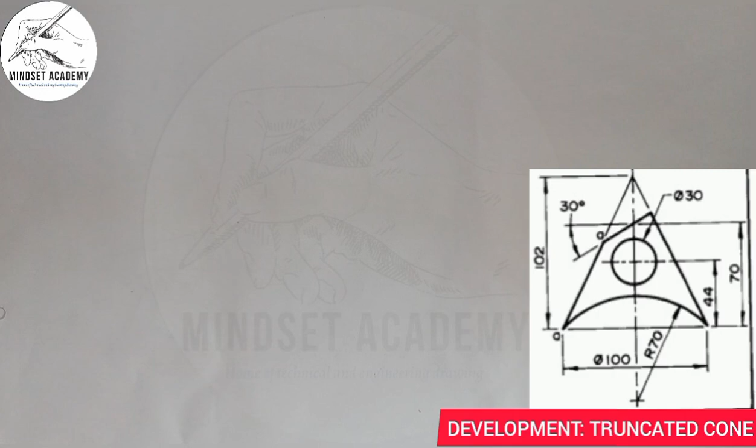So we have to reproduce this figure, then we develop it. The first thing you do is draw your horizontal line this way, and also draw the vertical line this way.

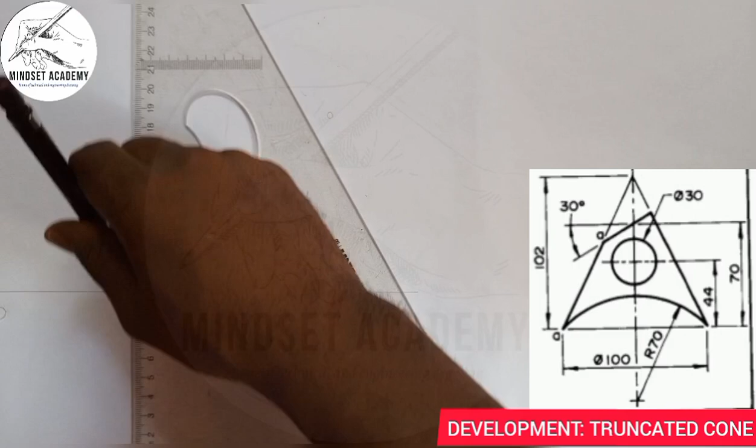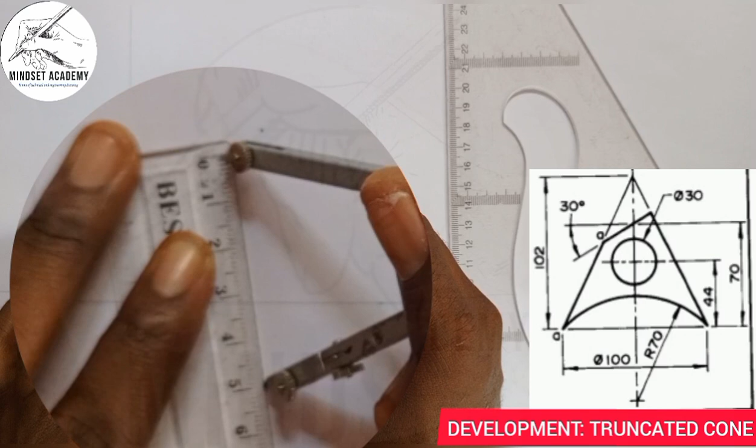The diameter is given to be 100 at the base, so I'll take half of it, which is 50. I'll mark from 0 to 50 in this manner, and place it at the center point here. I'll mark 50 to the left and 50 to the right, making 100.

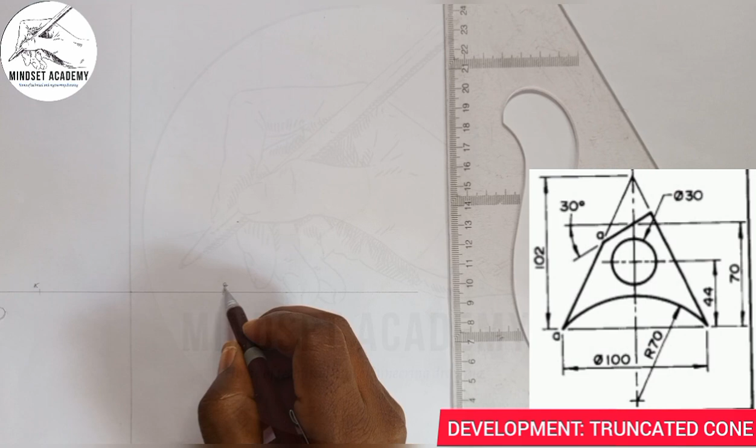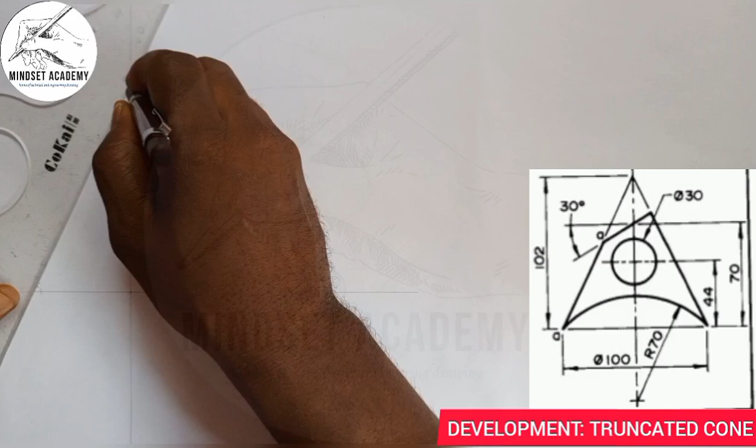Now I will take this point to be point A and this point to be point B. The height is given to be 102, so I'm going to measure a height of 102 from 0. This is 100 and this is 102 here. Then I will join those points together. Where I mark 102 is my point C, and I'm going to join from C to A and also from B to C.

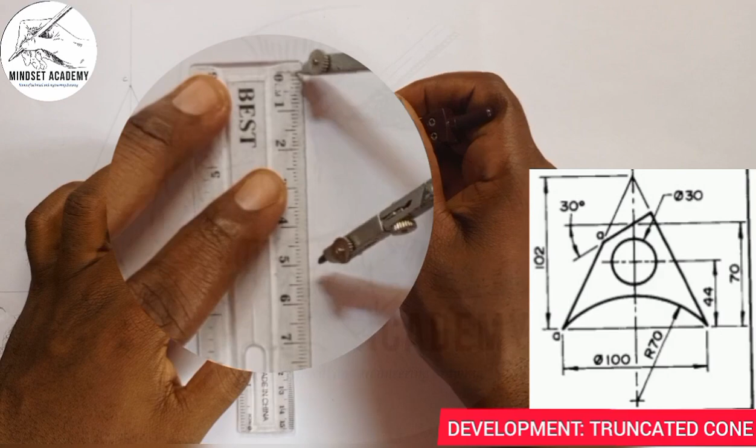Now there's an arc at the base here, with a radius of 70. So I'm going to measure a radius of 70 on my meter rule, from 0 to 70, and place it at B. I'll strike an arc. I'll place it at A also and strike another arc. Where they meet, I'll take this point and get this arc this way.

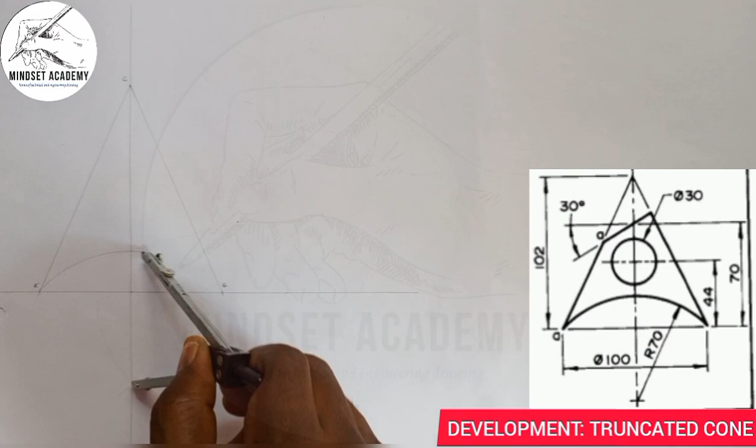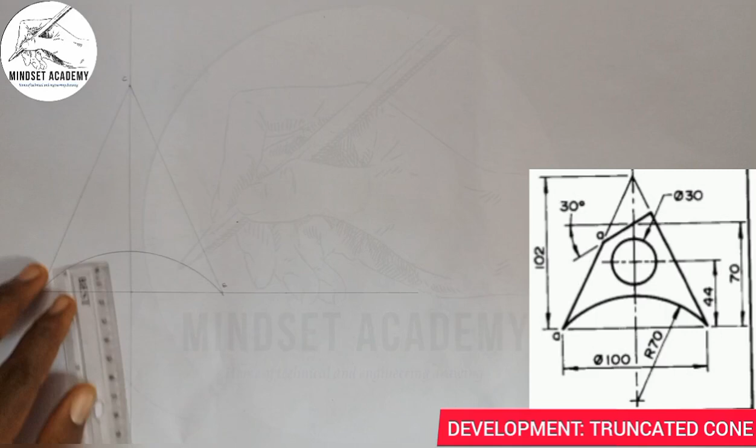Now the next one is at a height of 70 millimeters, it is truncated. So I'm going to measure a height of 70 from here. From that height, it is truncated at an angle of 30 degrees, this way, and I'm going to draw my straight line from here straight down.

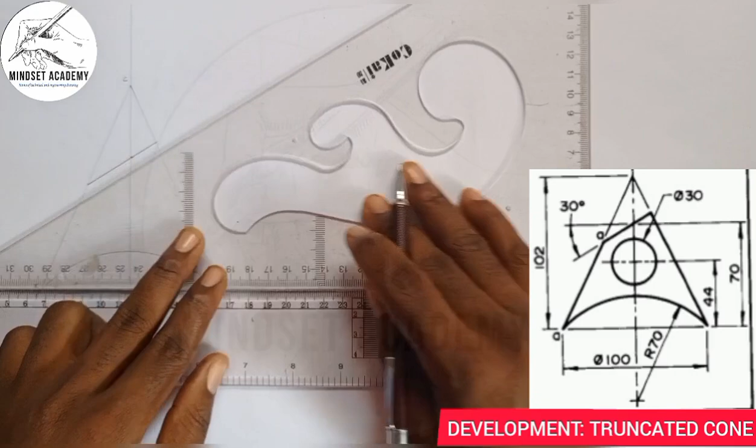And I will join those points together, from here to this point, and from here to this point.

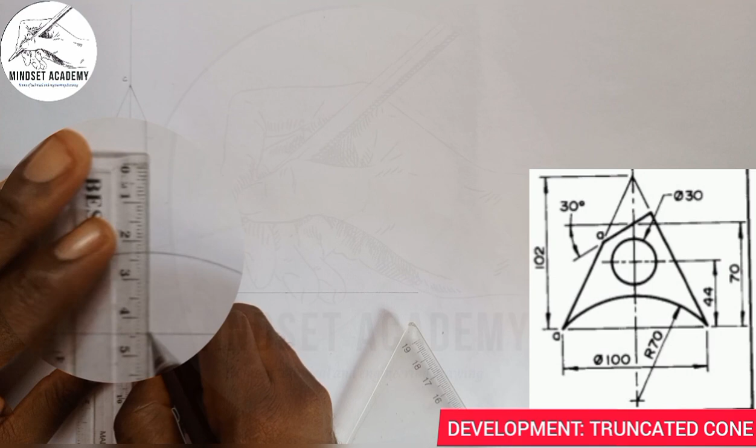Now the next thing is there's a circle at a height of 44. So I measure 44, this is 44 here, this is what we have here, and I'm going to draw my circle.

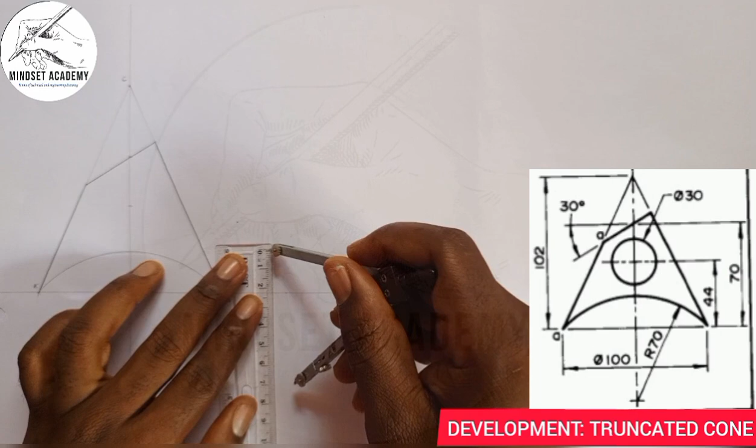And the circle has a radius of what? We're given from the question that the circle has a 30 millimeter diameter. So I'll place it here from 0 to 15, taking 15 as the radius for you to draw a 30 millimeter diameter circle there. This is what we have here.

So we have successfully reproduced the figure that is displayed at the right hand side of the screen. The next thing is for us to work to develop it.

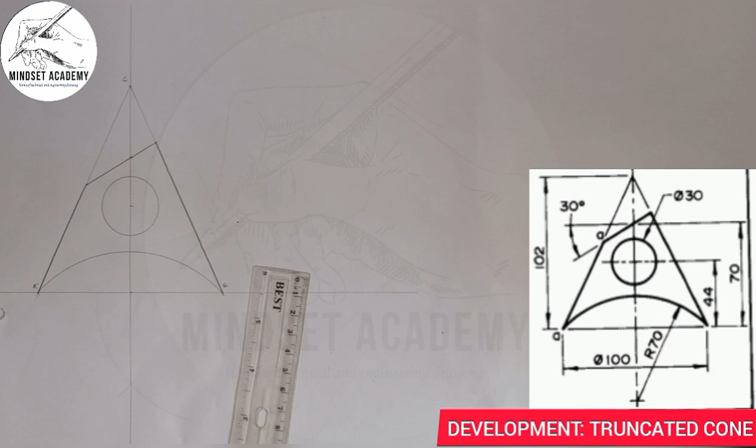Just like we were doing in the previous video, you take your compass, place it at the center here to this point, and you draw a semicircle. Then with the radius of the semicircle, you divide it. You cut here, you place it here also, cutting using the radius you used to draw the semicircle.

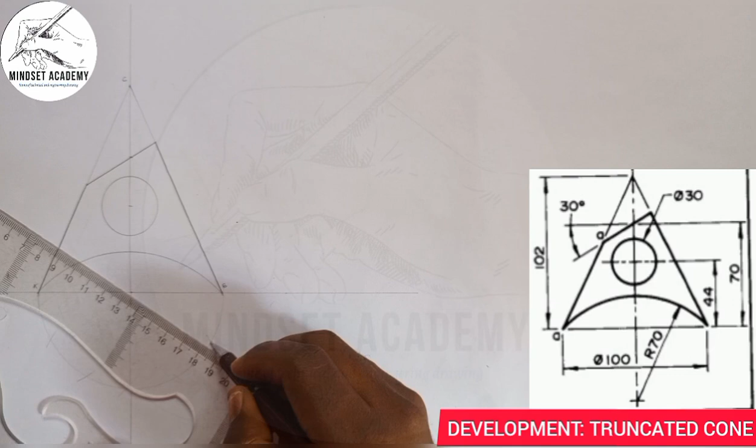You place it here, you cut here, and you cut here, and you take them towards the center of the semicircle. So this will come here, and then this will come here, and this will come here, and this will come here.

So I'll say this is 0, 1, 2, 3, 4, 5, and 6. I'll take those points to touch the base of the cone. So if I should do that, touch the base of the cone.

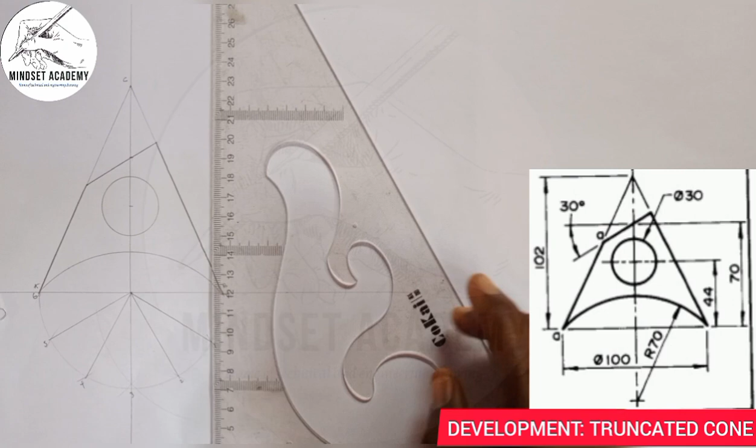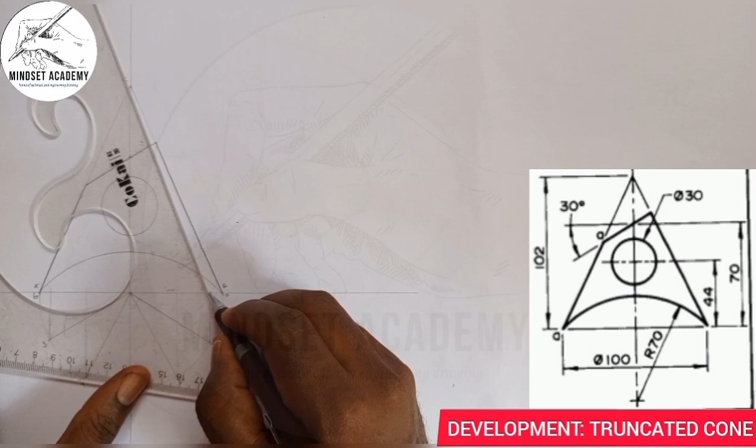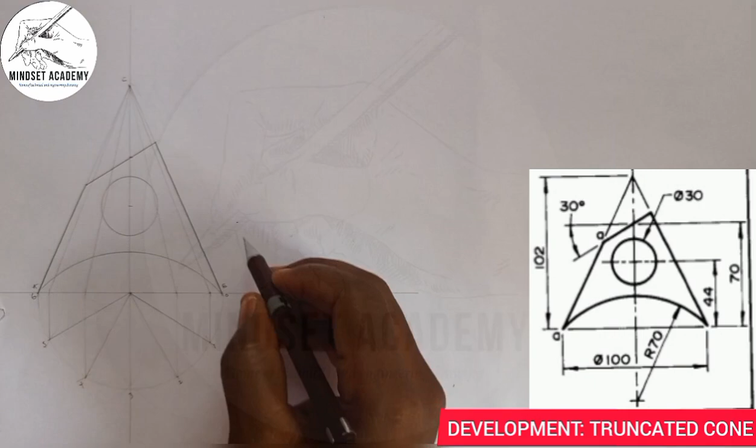Now I'll just pick any point. Let's say this, I'm taking this point here to be my point C. This point C, this is it here, and I'll take the true length of this cone, and I'll place it at point C, and I'm going to draw an arc this way.

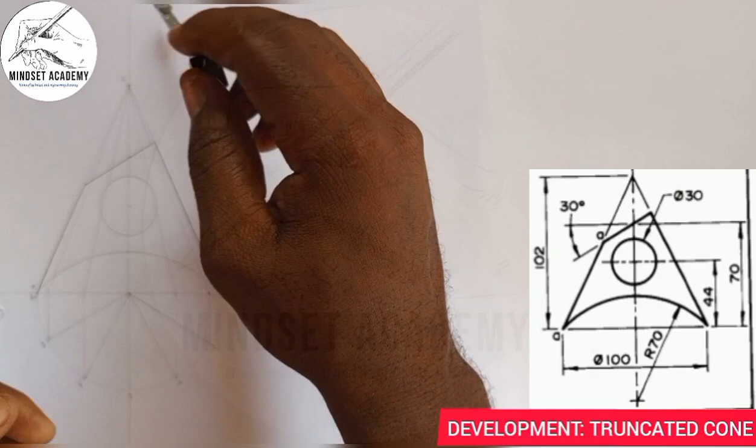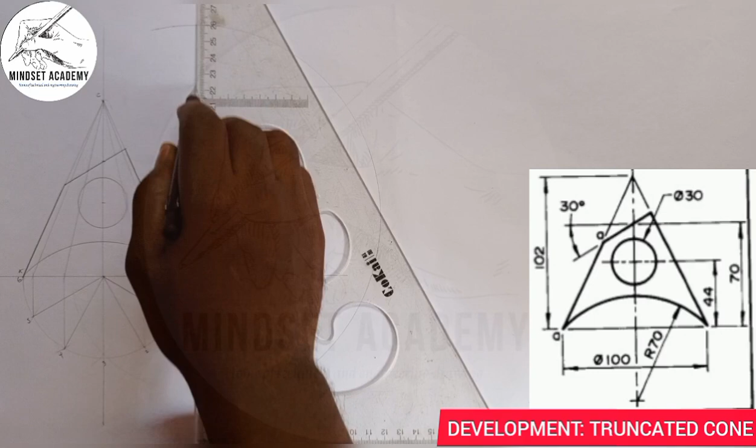Once I've done that, I will now move this point C vertically upwards to get my point 0. You can see that, that is from C to 0. I'll place it here.

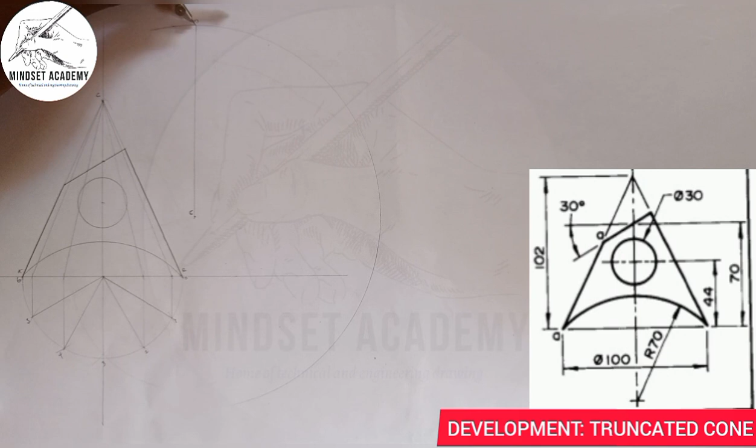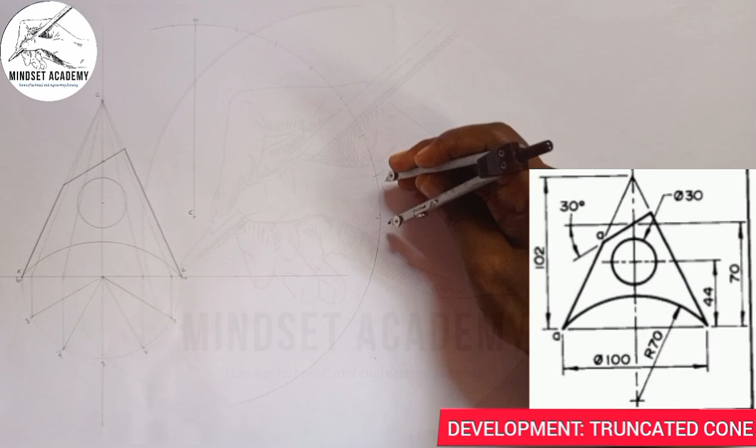That taken, I'll take the radius of this division here and start marking. So if I come, this will be 1, 2, 3, 4, 5, 6, 5, 4, 3, 2, 1, 0. So 0, 1, 2, 3, 4, 5, 6, 5, 4, 3, 2, 1, 0.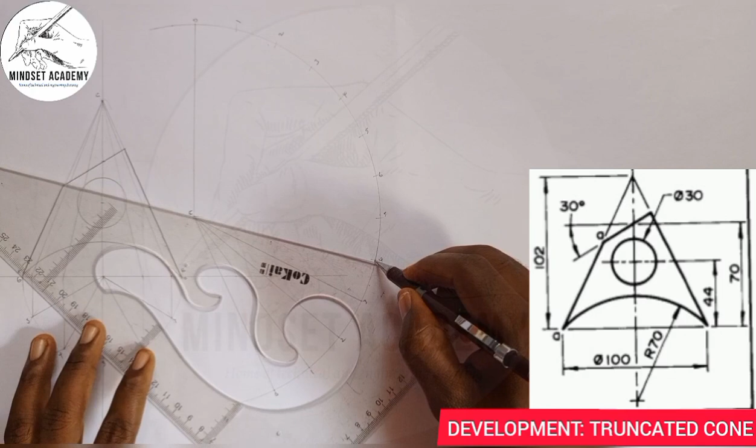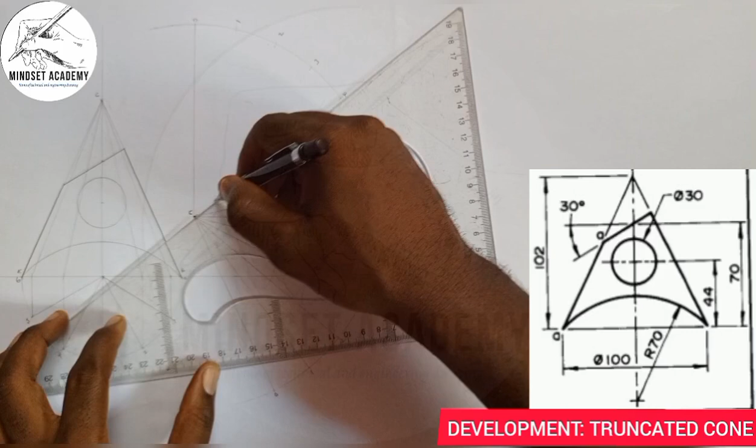And I'm going to join all of them to point C: from 0 to C, from 1 to C, from 2 to C, from 3 to C, from 4 to C, 5, 6, 5, 4, 3, 2, 1.

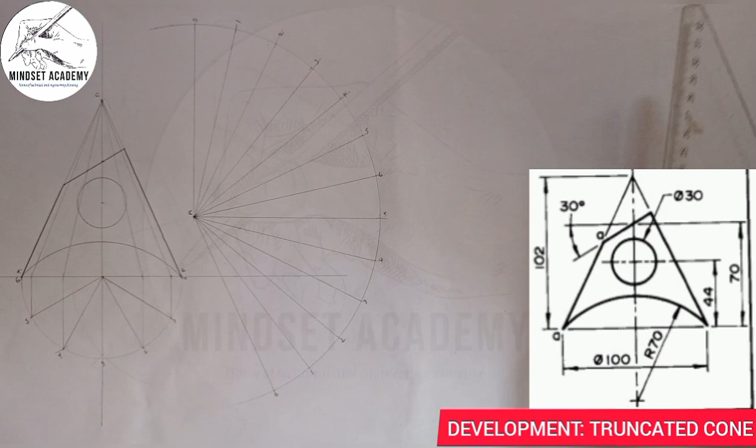So if I should come here, I'll take my compass. Let's start from C to 0. I'll come from C and mark at 0. This is 0 here, and this is also 0 here. I'll come again, this is 0 here. I'll go to 1, I'll go to 1 here, and mark on 1. This is 1, and this is 1. I'll come from C again, mark at 1 here. I'll come to C, mark on 1, and mark on 1.

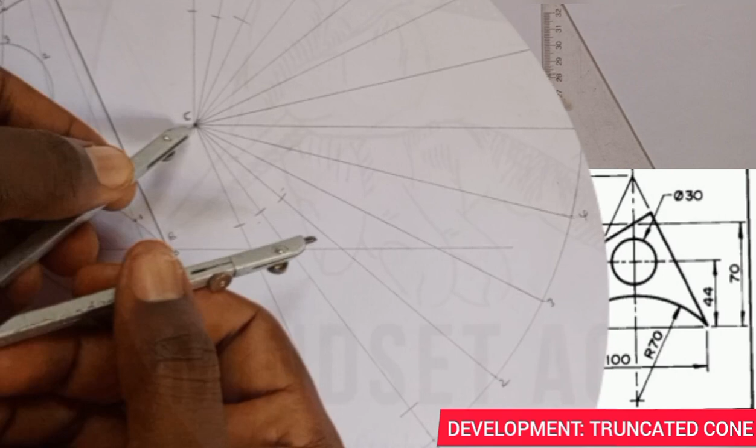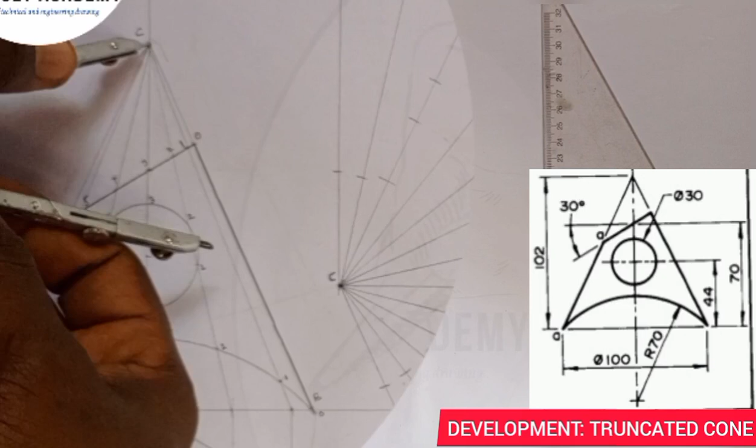I'll go to C, mark on 2 here. I'll come here, mark on 2, mark on 2. I'll come here also from C again, go to this 2 on this circle, mark on 2 again, and also mark on 2. I'll come again from C to the other part of the 2 here, come on the line of 2, mark on 2 again, mark on 2. I'll come here to the other part of 2 again, and C to this 2 here. I'll come to this point, mark on 2, and mark on 2, just here.

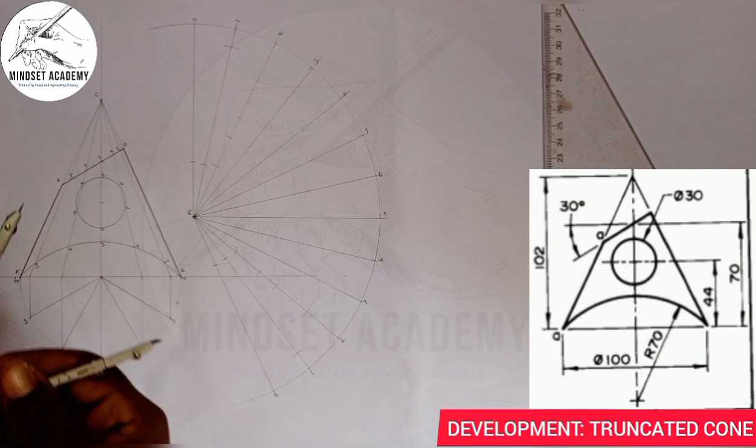Now I'll come to 3, on C to 3. I'll come here, mark on 3, and mark on 3. I'll come on C also, take the other part of 3 here. I'll come here, still mark on 3, mark on 3. I'll come to the other part of 3 here, come to this point, mark on 3, and mark on 3.

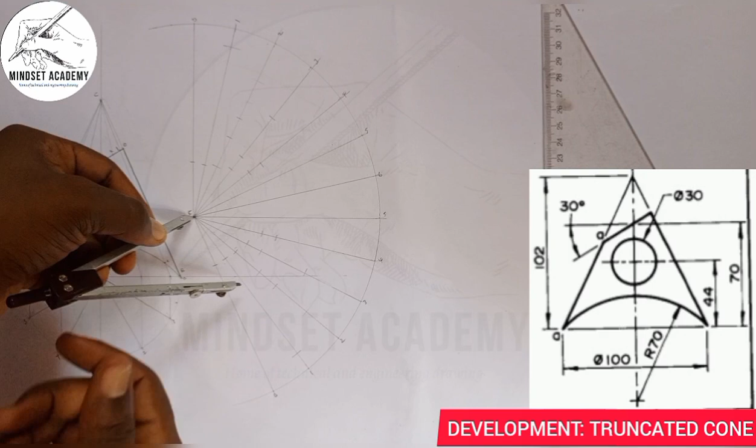And I'll come to 4, from here to 4. I'll come to C, mark on 4, mark on 4. I'll come to C also on the line of 4 also here, where the line cuts. I'll come here, mark on 4, also mark on 4. I'll come again from C to the other 4 here, mark on the same 4 also here, and mark on the same 4 also here. I'll come on this 4 here too, place it here, mark on the 4, and mark on the 4.

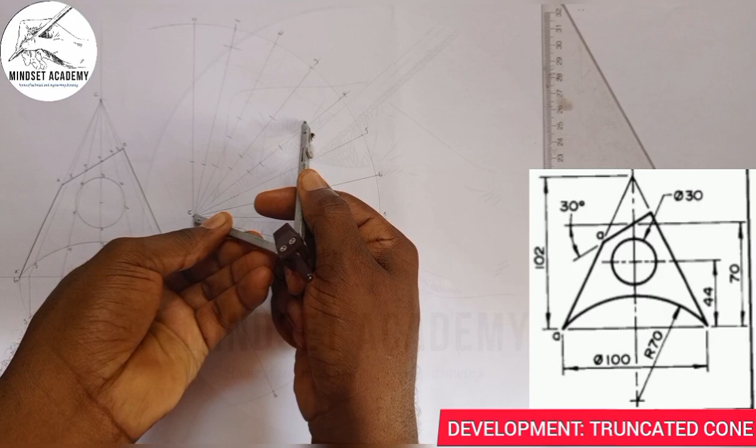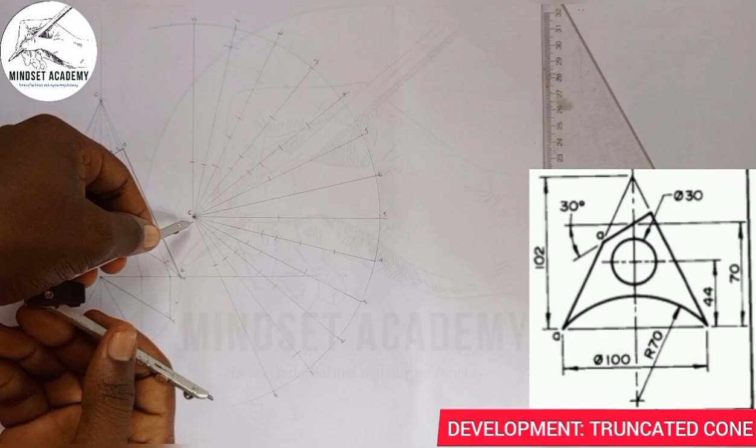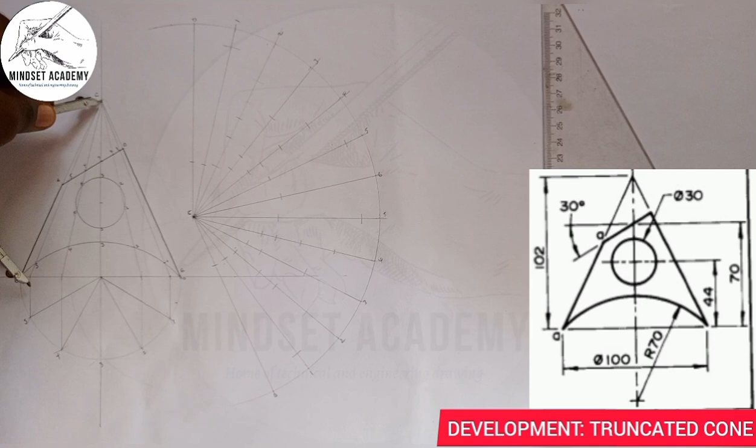I'll come to C also and go to 5. I'll come here, mark on 5 here, and mark on 5 here. I'll go to the 5 also again here, come to C here, mark on 5, and mark on 5. Then 6, I'll place it here, mark on 6. Then the last 6 is just the base of the cone here, which is this point here. So I'm going to join all those points together.

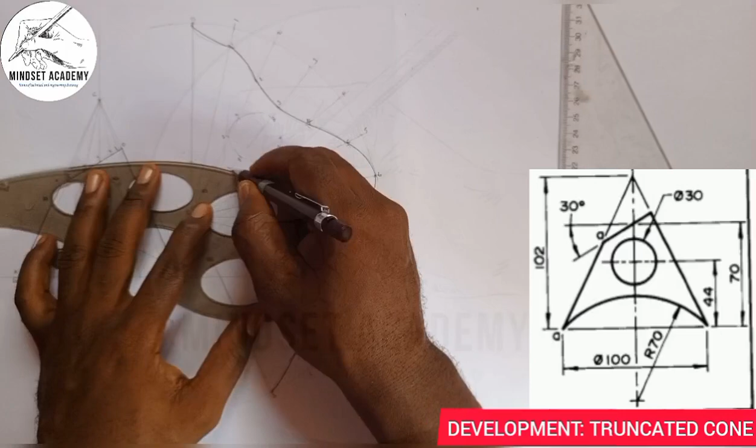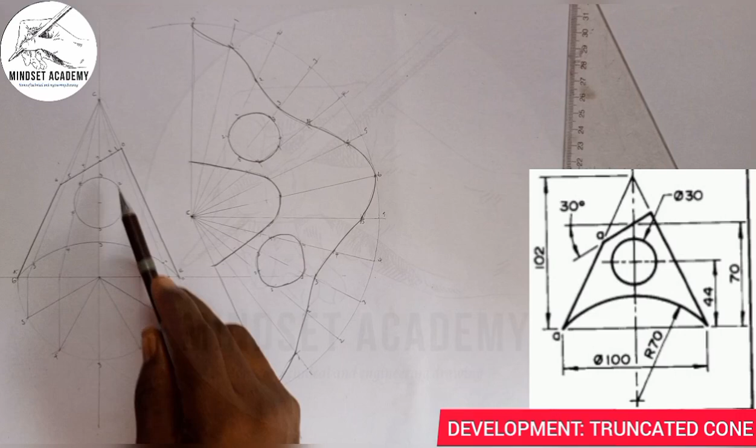This is what we are going to be having when you develop this given figure here. So all these parts you're seeing, 0, 1, 2, 3, 4, 5, they are not touching the base. You can see 0, 1, 2, 3, 4, 5, they are not touching the base of the cone. That is why they are lifted up. Then all these are not touching the apex, that's why they are down this way. And this circle you're seeing here is what we have here.